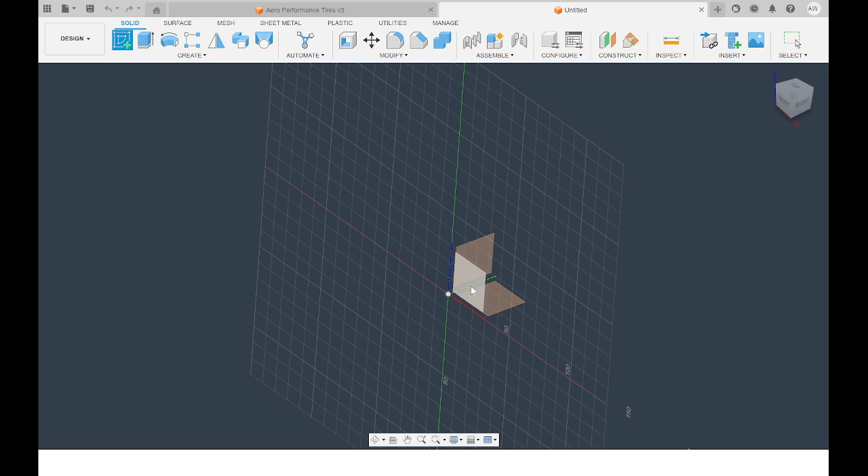So first we're going to do a create sketch right up here in the top left. You're then shown three panels: the XY plane, the YZ plane, and the XZ plane. We're going to start on the XY plane, so we'll click that. Fusion automatically aligns our view here, and you can see this grid, along with all these different options on the right for things you can do.

What we're going to do first is really simple: we're going to draw a circle. Over here there are lots of options to create shapes, like rectangles, arcs, ellipses, and splines. We're going to draw a center diameter circle. Oops, I didn't click the origin.

You want to make sure you're clicking right at that origin point where the little square pops up. Click right there, and we can just make it some arbitrary width, we don't have to worry about that. But look at that, we've got a circle. I'll hit escape to exit.

Now if I wanted to dimension this circle and make it a specified width or diameter, you can hit D for dimension tool, or hit it up here. I'll hit D and drag this out to the side where I can see it. We want to set this diameter to, say, 80 millimeters. You can type in any unit and it'll automatically do it, so if you type in 80 feet—

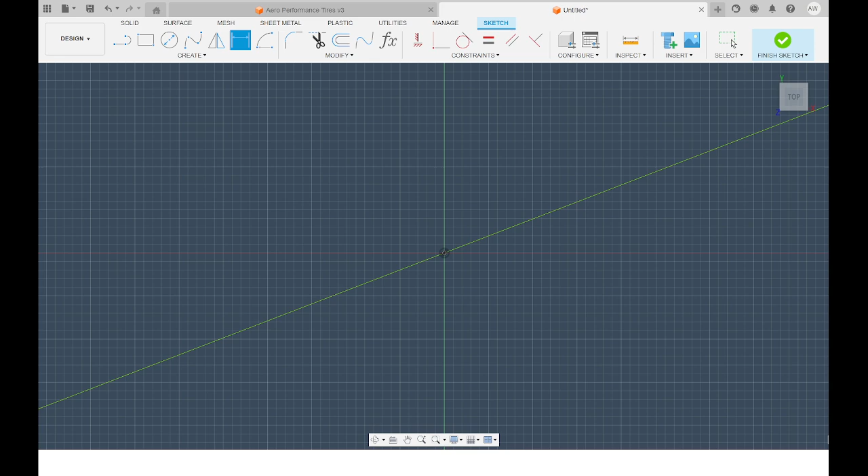Oh, we didn't like that—feet. Whoa, way too big. We don't want it that big, that's stupidly big. Let's go back to millimeters.

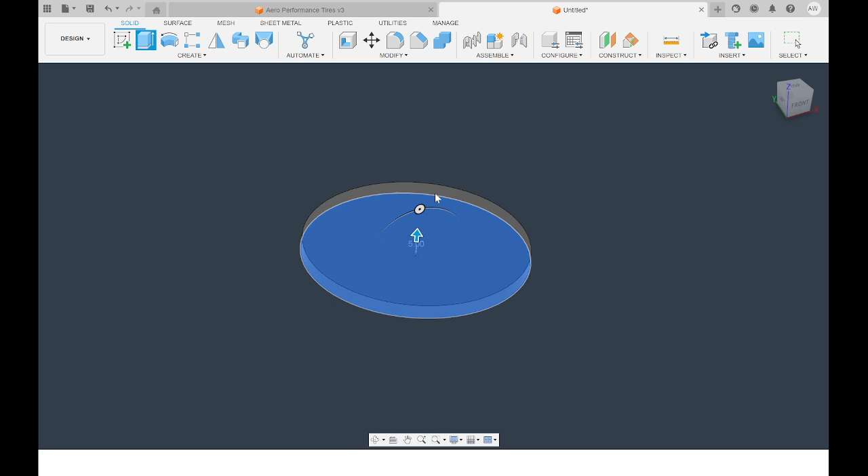Okay, so we've drawn a circle. Now if we were going to do something, we might want to extrude that circle. So I'm going to hit extrude and say 5. But I'm not ready to extrude our circle yet, I want to make some more parts of this profile before we do that.

There's one thing I missed, which is that you should always name your sketches. So I'm going to double click on this and say head profile. Another thing is that we should click on this and actually finish creating the profile of our sketch here, so click that top view.

Now we're making a skull. We're making a skull from the front. It's not going to be truly three-dimensional, it's going to be more like an extruded cross section.

So what I'm going to do to create the cheekbone, I'll say arc—let's say 3-point arc. I'll grab somewhere over here, go down here, and make it go in a little bit. Look at that, now we've got a nice little jawbone. I don't quite like how that is, so I can drag this to different points to get it to be a different shape.

Same with this, and same with this. I think if you grab this, also adjust it a little bit. Let's go back—but I like that. Now you could create another 3-point arc, which again means you're essentially drawing the two points where it's going to go between.

You could do something like this and draw out the radius of that, or you could do a mirror.

When you do a mirror, it's going to prompt you to click the object you're going to mirror, this being that line, and then a mirror line. Unfortunately, you can't just click this middle axis.

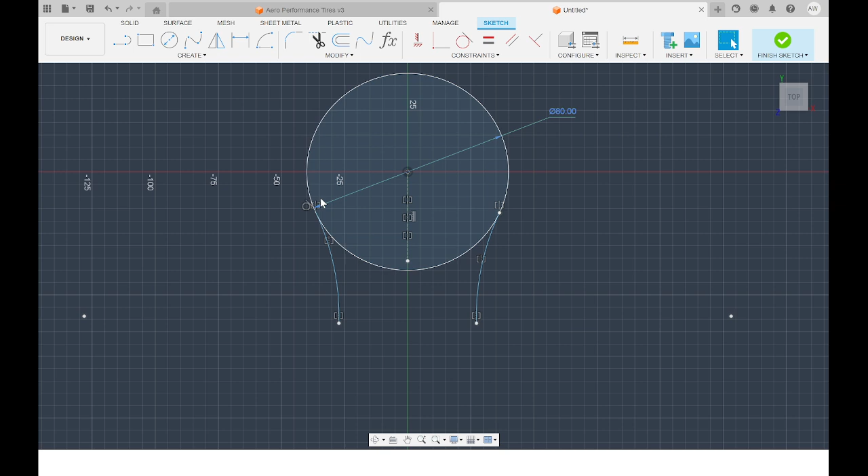So now let's finish the bottom of his jawline, and let's do another arc, another 3-point arc. Let's click the two bottom points here, give him a little jaw. Little smiley boy, yeah, perfect, exactly how you draw.

So everything is symmetrical and constrained, well, mostly everything is constrained. We're not going to get into constraints today too much. We drag everything around, you can see we can configure this. That's the great thing about Fusion, is that everything is now related.

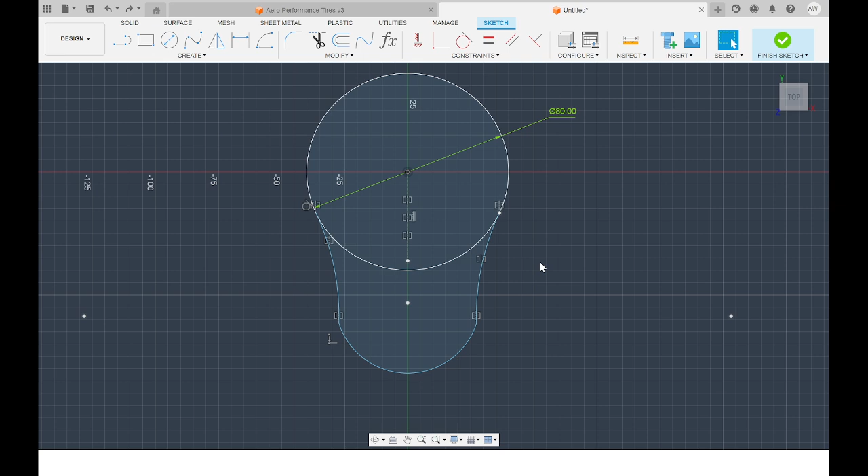So let's put it back to where it was and just hit Control Z to go back. Let's hit Finish Sketch. I like this, so now we've got a sketch on this XY plane.

Let's extrude it. Let's hit this Extrude button, which allows us to click these profiles and specify some distance for them to raise up. You can see we can click them individually, we can unclick them. We want this whole thing to go up, so I'm going to make it go up 5 millimeters.

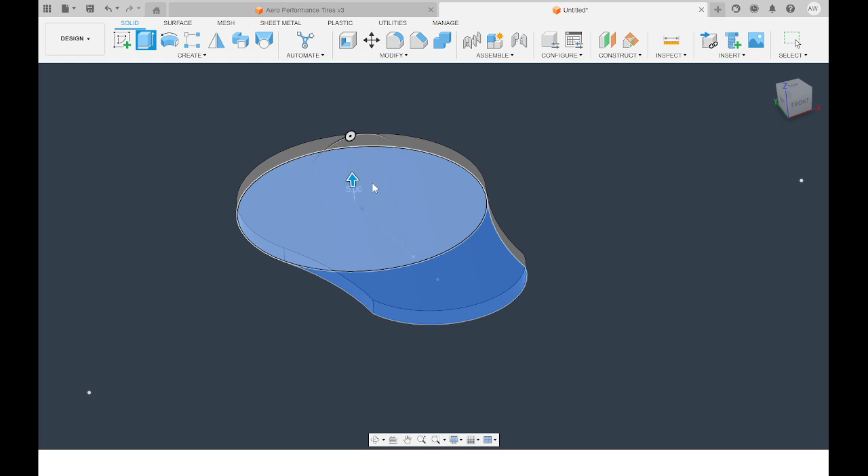And if you ever want to edit that value, or switch between how many millimeters it's going up and how many degrees of rotation it's going, you can hit Tab. I'm just going to say 5 millimeters. Look at that, that's kind of the basic outline of a skull.

You might be kind of curious about how I'm moving around so fluidly. It's because I have a little space mouse in my left hand. Alternatively, you can also just grab and rotate around like that.

Cool, I like that. Sorry, you keep using the terminology sketch, is a sketch supposed to be like put onto a piece of paper and then you're supposed to like? 'Cause I know that a sketch in Fusion you can think of as something that's on a piece of paper, but that you can then make that piece of paper into a 3D object.

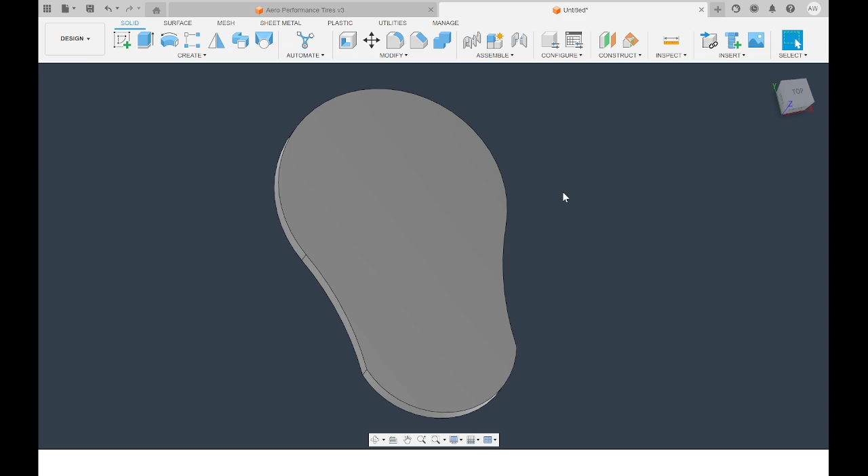Which means that you can sketch on any face or any geometry as long as it's planar, I think. So if I was to sketch on, or oops, that's not what I wanted to do. Exit, finish sketch, we're going to delete that.

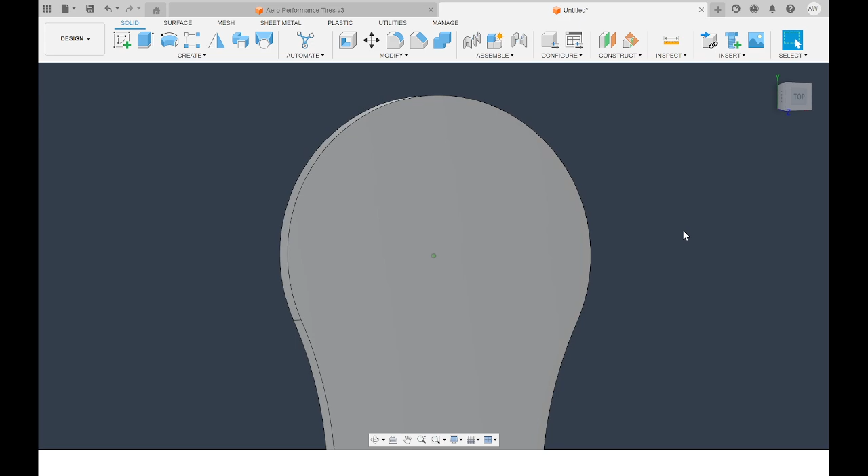I don't know how well it would like it if you tried to sketch on, say, it's not even letting me click this curved face here. You would have to make it at an angle. Exactly, you'd have to make a tangent plane at some point here to do that. So you can think about it like any flat or planar surface that you see here, we can sketch on.

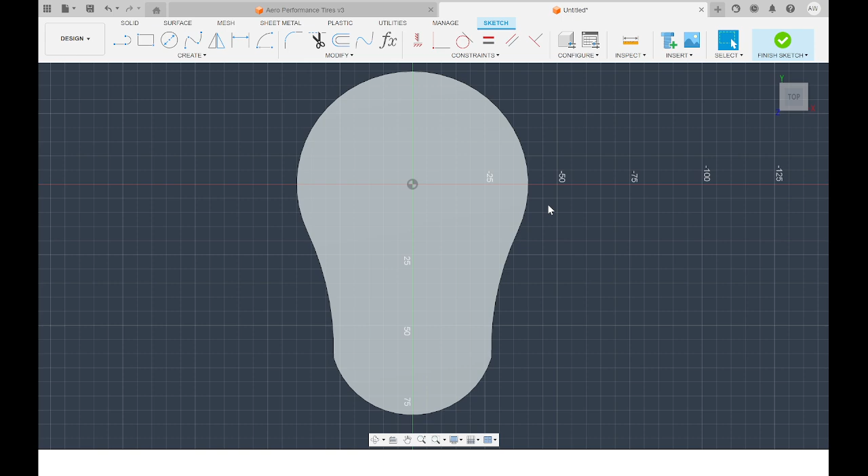And that's actually what we're gonna do next. We're gonna create a new sketch, but on this face. Now it's still aligned and parallel with that top view, so it's essentially the same thing as if we had created a sketch on the actual bottom plane that we did earlier. But what we're doing now is we're doing this sketch with respect to this face, so everything we do after will treat this face as the origin point. That's good because if you have a face way off to the right of your model, it's not gonna get mad at you, it'll let you do stuff to it right there.

Let's draw the eyes. Now this is one of the most fun parts about Fusion, if we do another circle, anywhere, doesn't matter where, draw a little circle, and draw another little circle. It's kinda hard to see on this model because the contrast isn't very good. Let me see if there's a way I can make it better.

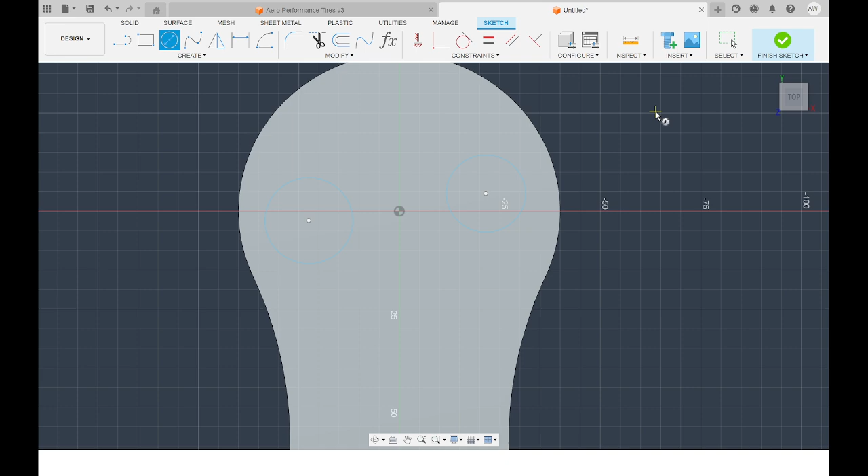Let's make the skull black real quick. I'm just gonna hit finish sketch, go to modify appearance, and it's gonna pull up something potentially. I'm just gonna grab nylon, like a generic dark material, from the Fusion Appearance Library. That helps a little bit, yeah, cool.

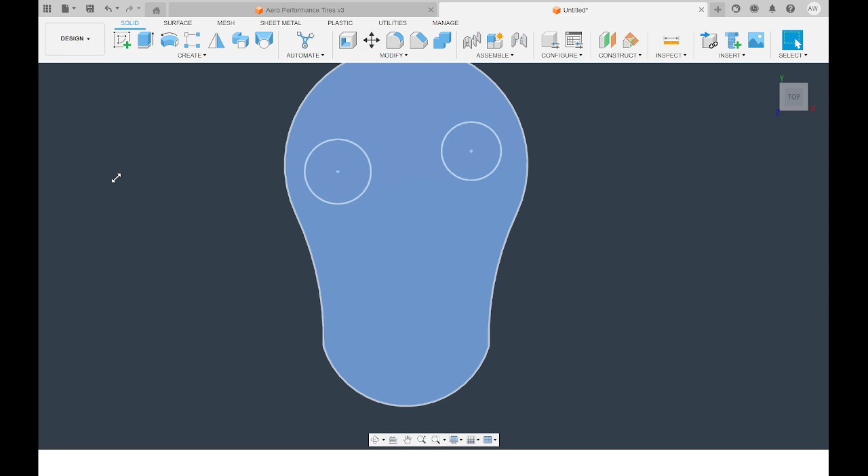So now let's reopen Sketch 4. I'm gonna rename it to Eyes. Beautiful. So you might ask, how do I make these symmetrical? How do I make these the same such that if I do something, they'll do the same stuff? We've drawn 2 circles, let's make them equal. We're gonna go to this Constraints tab up here in this sketch window and hit Equal, Equal. Now they're the same size.

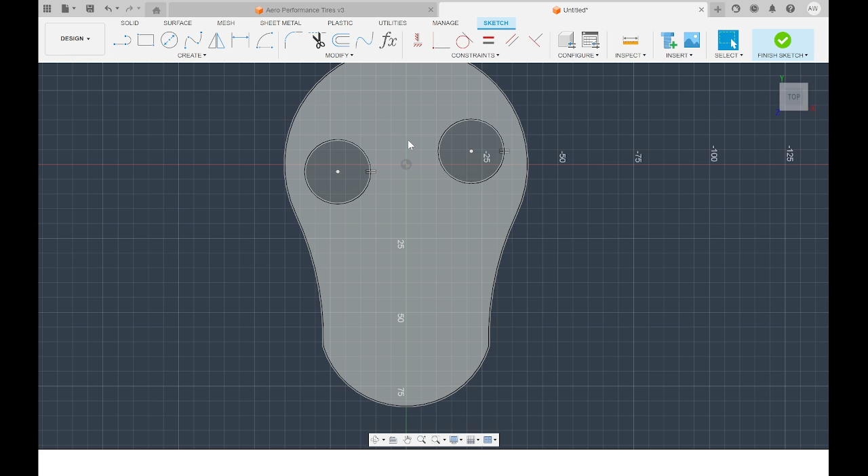We can do the same thing if we say Symmetry. Click you, and I think, no actually, let's do, it should be parallel perhaps? No, what did I do earlier? Did I mirror these? No? I may have mirrored them. What did I do? Perhaps, and I broke my browser. Oh no, it's fine. Symmetry, symmetry.

Let's draw a little, I wanna see if that symmetry tool works before I try a different approach. I just made a line down the middle, I'm gonna make this a construction line. Let's do the mirror command, or the symmetry command. There we go. We drew an axis down the middle, said mirror these two objects, and now we have a symmetrical object, meaning not only is it gonna be symmetrical in size, whoa, big eyes, but also symmetrical in position.

Way out here, do like this, and that's all we need. Now another thing we can do is dimension one of these and say that it's 20 millimeters. Then if we change it to 30, the other one will reflect that change. Let's leave it as 20, we'll come back to that in a minute.

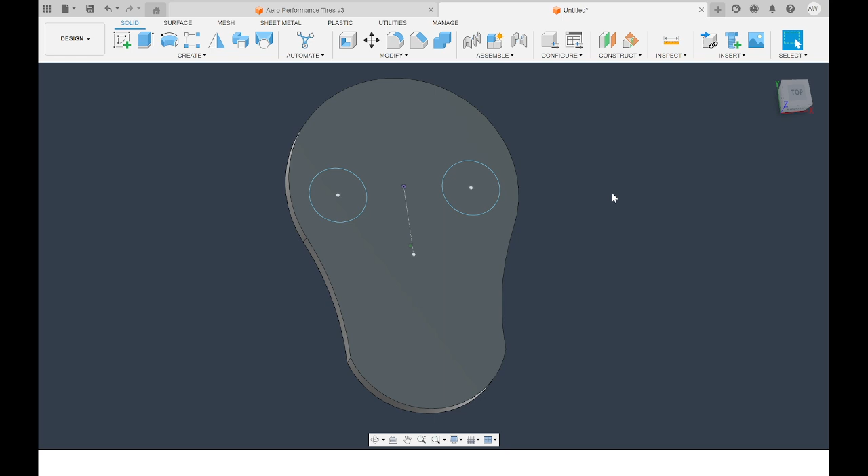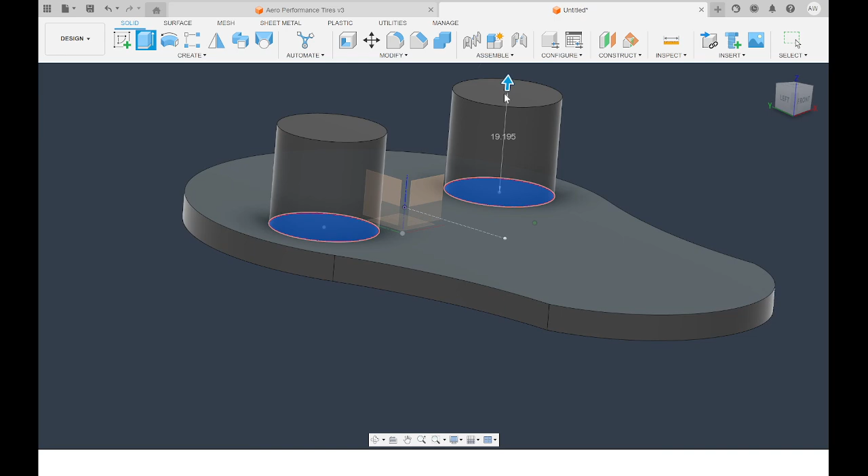Let's hit finish sketch. We sketched, now let's do something. Let's extrude these eyes, but instead of them going outward, like say this, let's have them go to object, and then click this back face. Check that out, they're gonna subtract from our model up to this rear face. Alternatively, kind of the noob way to do this is just to go yoink, and now they're just going through. But if there was something below here that you didn't want to extrude, you could just hit up to face, or up to object, and it'll only go that distance.

And this also works if you have a curved plane that you're trying to extrude up to. If you're extruding onto something that's all kind of messed up geometry, and you say up to part or up to object, it'll fill in automatically and connect with it as it should be.

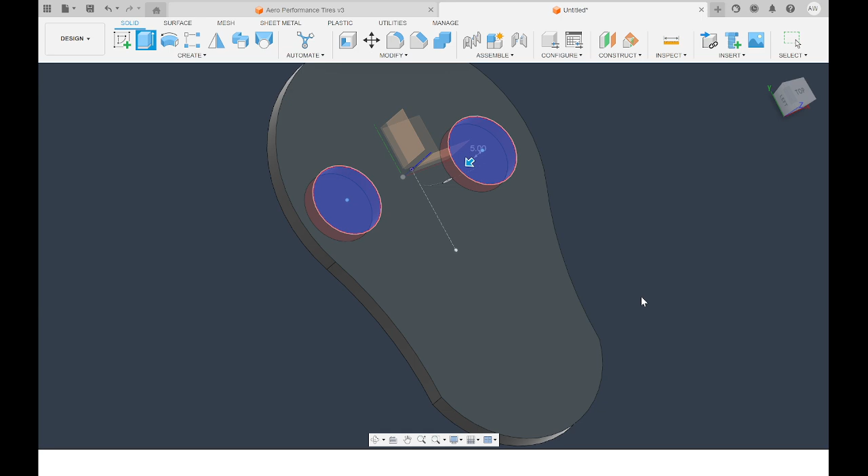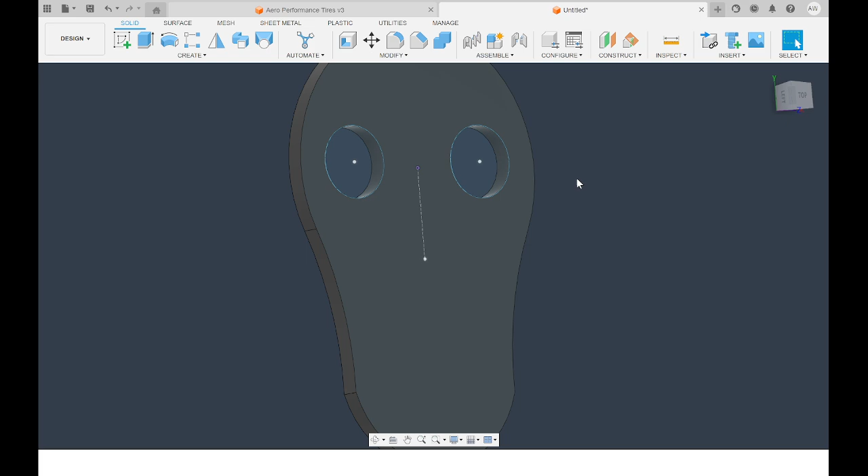Pretty good, right? And our sketches are currently hidden, but if we re-enable this sketch, we can actually still drag these around and change their size. Although we can't change their size because I configured their size to be 20. If I had left that blank, then we would have been able to, but look at that, we can do all kinds of fun stuff, just drag around and play with it and find something we like. So let's drag them back around here. Now let's make the nose.

The nose is gonna be pretty easy. Let's create a new sketch, again on his face. Let's go to this create menu, and you can see that we can also create polygons.

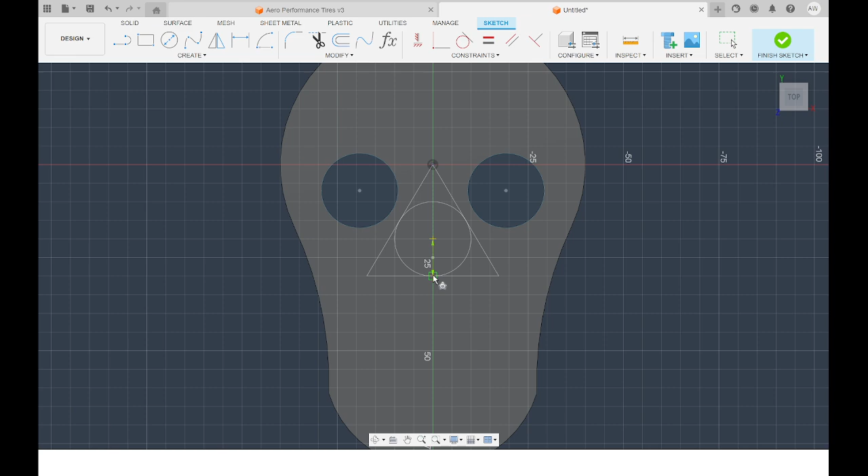Let's do a circumscribed polygon, and just, I don't know, let's hit this point right here. We can make it big, and that's a hexagon, it's not very good. We're gonna hit tab, we're gonna hit 3. Now we've got a triangle. And you can align it so that it's like this, or I think it's more likely like this. Look at that, got a triangle.

And if we had wanted to, we could make it so that we could constrain it. Actually, I forgot to name it again. Nose profile.

We went back into nose profile. Pretty sure we can make it so that it's only horizontal and vertical, which means that if we move it, it's not going to do what I wanted. That's okay, I'm not heartbroken about it. I'm still learning constraints, so we'll leave that for now. But the point is, we've now got a nose.

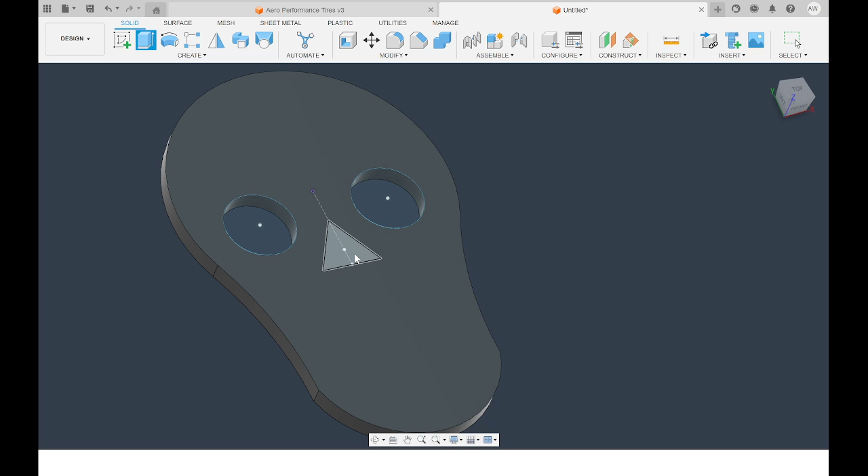What are we gonna do? We did something, we sketched. Now we're going to extrude. Extrude to the back of his head. And it didn't work, why did it not work? To the back of his head. Let's try that again, we're going to extrude this to the back of his head.

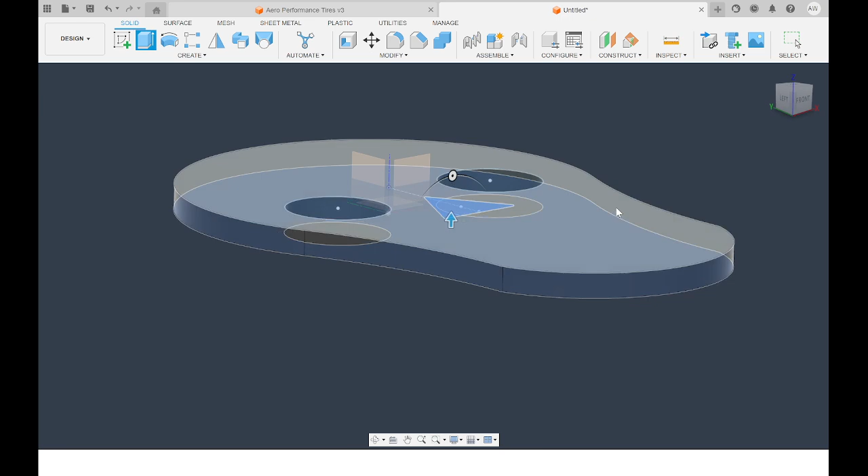And it's not subtracting anything. Oh, that's interesting, apparently I originally sketched it on this bottom plane. I didn't mean to do that. But no matter, because we click this face, and we're good.

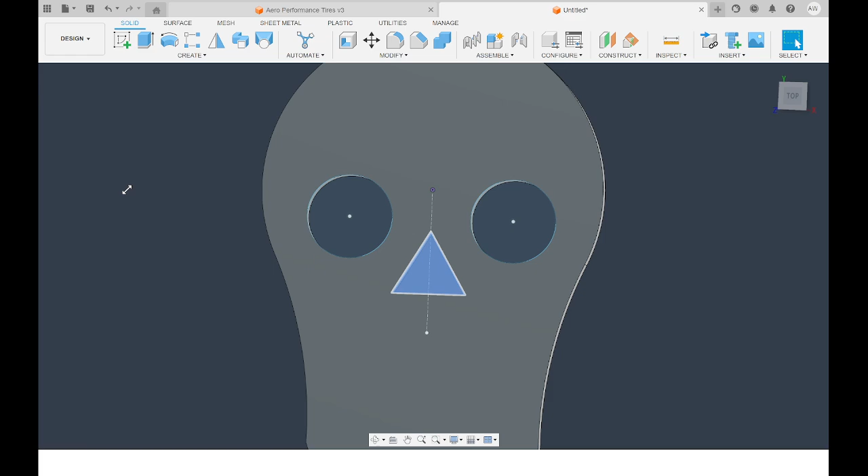So that's all pretty simple. We can move our triangle around a little bit, we can make this side bigger and what have you, and we can grab these points if we go back into nose profile, and we drag this down a little bit, all kinds of stuff. Right now it's centered on this middle axis. It's too big of a nose, so let's bring that in a little bit.

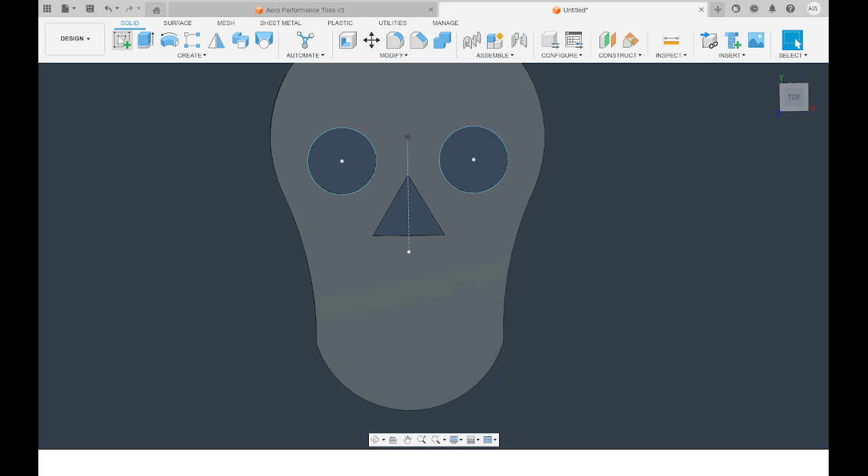Now we're gonna make the teeth, and the teeth are gonna be a little tricky. So let's do a new sketch. Oops, I forgot to click the front plane. New sketch, front of his face, and then I'm just gonna draw a little rectangle, you know, simple little rectangle, something like this. And I'm gonna say, I'm not gonna say okay yet.

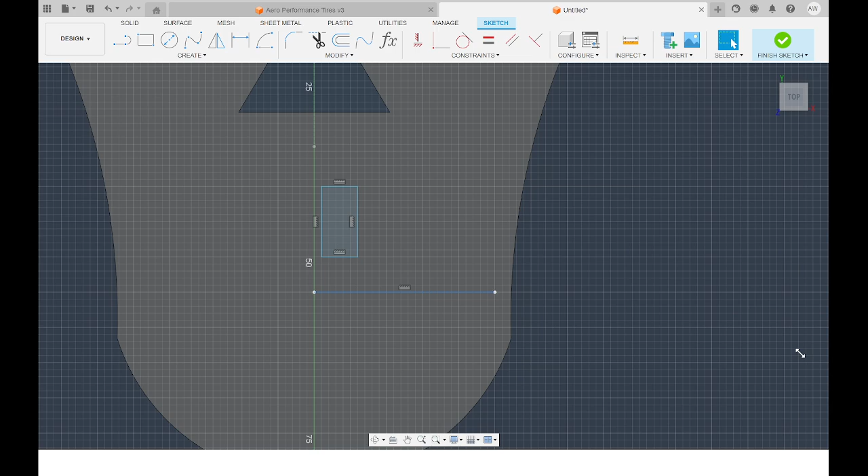I'm gonna draw another line that's going from here out to the side, and I'm gonna make it a construction line. Cool, we're not done with our sketch yet.

Now we're going to create a rectangular pattern. Teeth are a rectangular pattern, right? So let's unclick that, we don't want to make a rectangular pattern out of our construction line. We want to use the construction line to make our rectangular pattern. So let's click the different lines of our tooth.

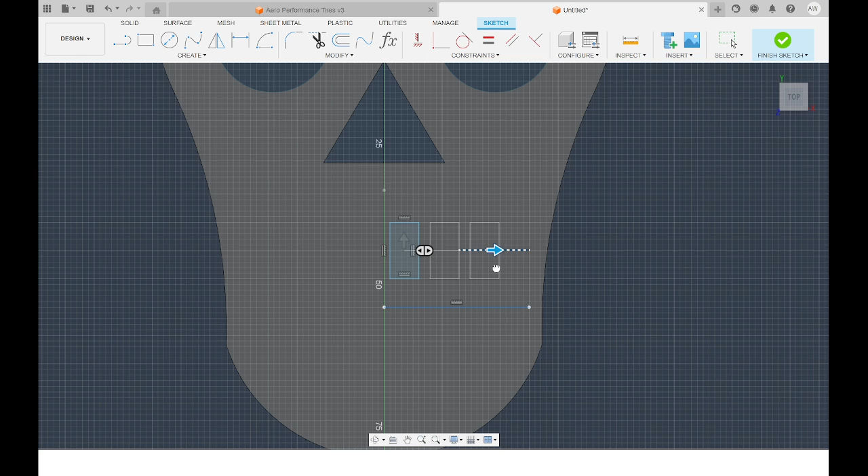How'd you get to rectangle pattern? It's under the create menu. Oh okay, I'm gonna hit directions, I'm gonna hit this. And look at this, pull out some teeth. We can also pull down some teeth.

And you can see right now that it wants us to do 3 on this axis, we're gonna make that 2, and then pull it back up a little bit. And then if we look at this other axis, we grab this, say 4, and we want 4 teeth going out like this. Let's make them like that.

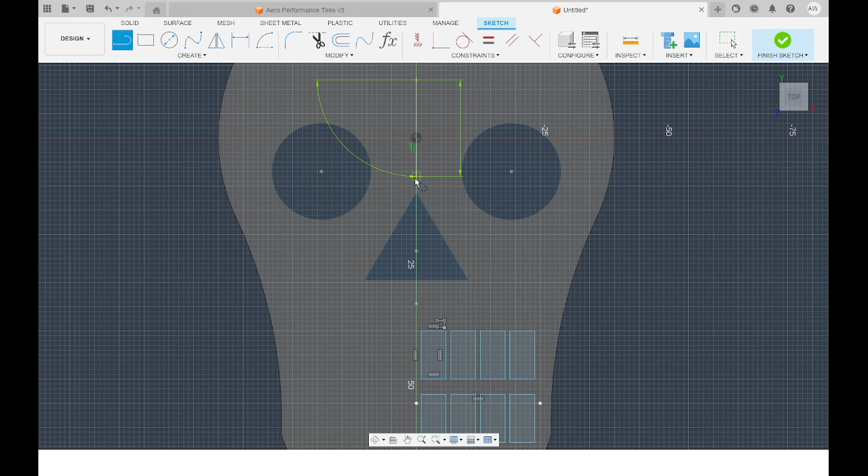Cool. Now, we might need to create another little mirror line, unless we revisit this one, in which case I can still reference that. Can I still reference that middle line? No, I cannot. Let's just draw another quick little mirror line, right down the center of his head here, and make that a construction line just for our own clarity.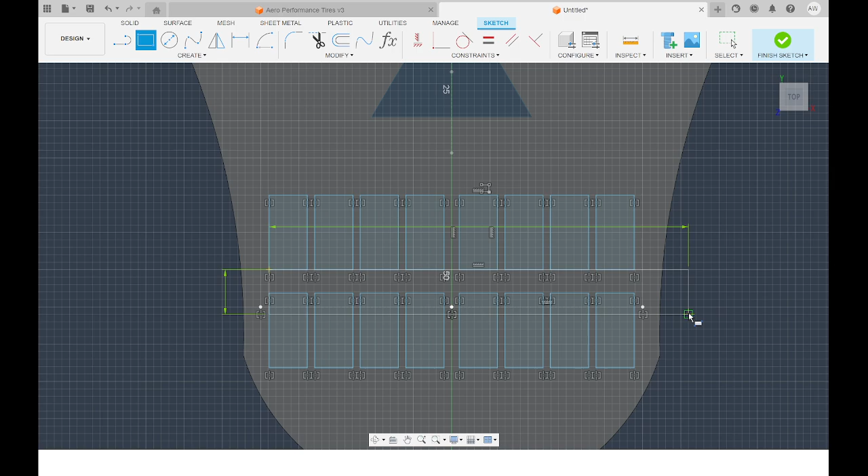Let's do a mirror, select all these, select our mirror line, got some teeth. And then just for my own sanity, so that there can be a gap in between these teeth when the time comes, I'm gonna draw a rectangle that kind of connects these outside-ish points. We'll get back to that in a second.

Well, these teeth I think should come out a little bit, so let's do an extrude. Let's extrude all these teeth. Oops, I clicked the main face, don't do that.

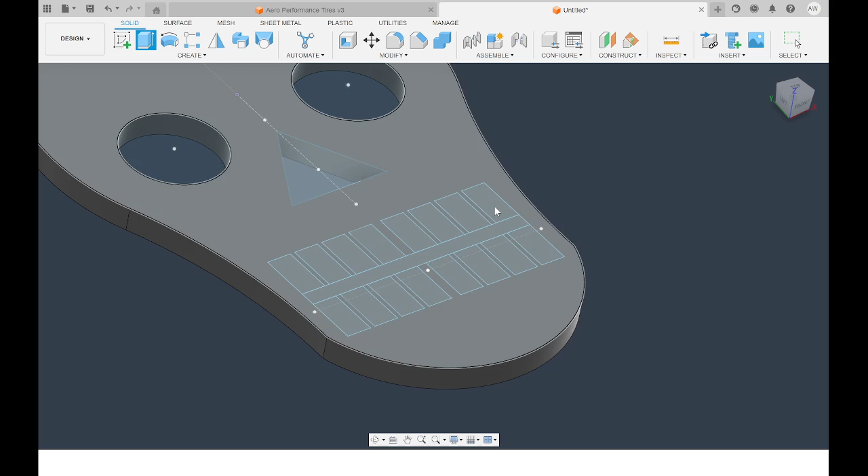Okay, extrude all these. You might be able to hit extrude on the whole sketch. As a matter of fact, let's try that. Instead of doing that, let's do extrude, sketch 7, extrude. That didn't work, oh well. Let's do, oopsies, I keep clicking that main face by accident. Zoom in a little bit. It's a little flashy, I apologize for our photosensitive viewers.

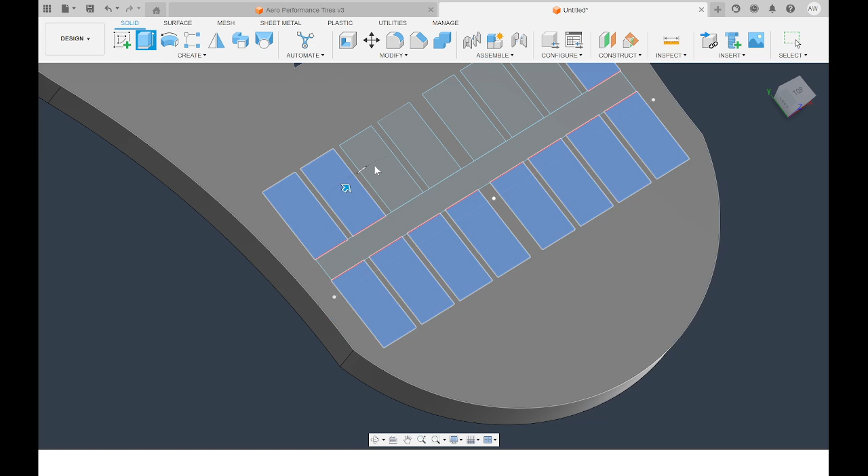Let's click all these. Actually, hide these sketches, that might help. Yeah, that did help. You can also tell if we turn off bodies, that should help. I could do that, unfortunately I've already finished. I would have done that probably. That's probably a pretty good idea.

Let's just extrude these out a pretty small amount. That's too little, let's just do 1. Sure, 1 millimeter.

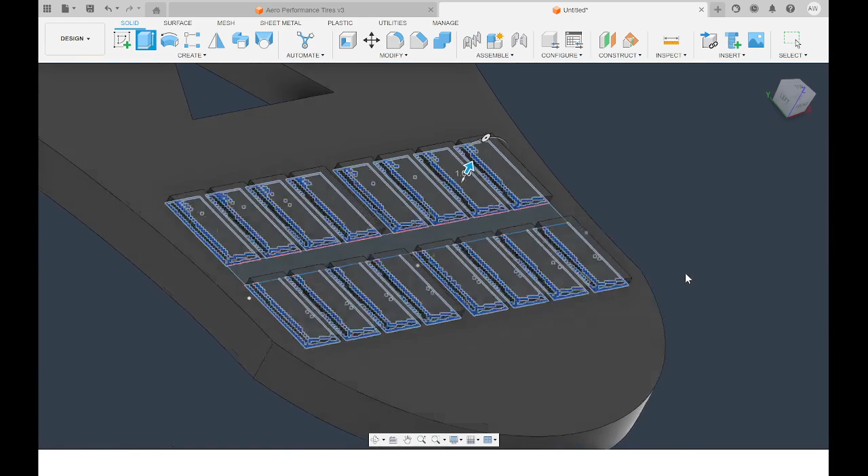If I try extruding again, what would happen? It might have been indicating an overlap was happening. Oh my gosh, I've never seen this before. That could be because of my surface. We're just gonna hit OK.

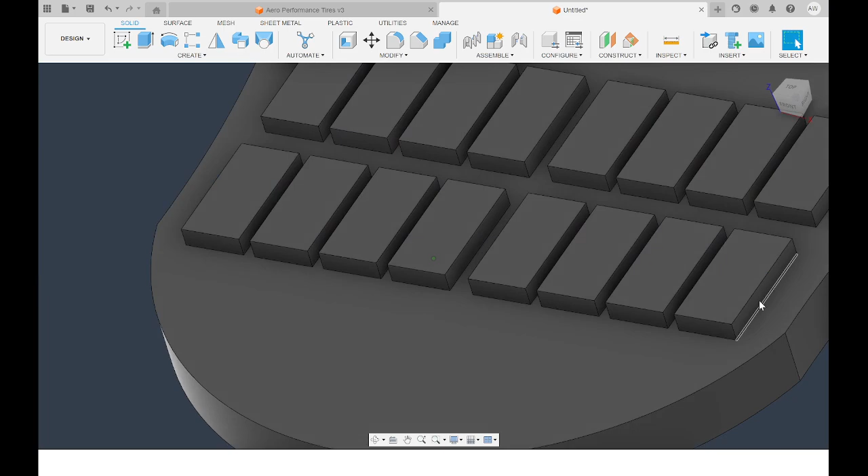Interesting, fascinating, we got some teeth. Let's do another really quick extrude. Remember, we made this gap in the middle. Let's extrude that again, down to the bottom of our object.

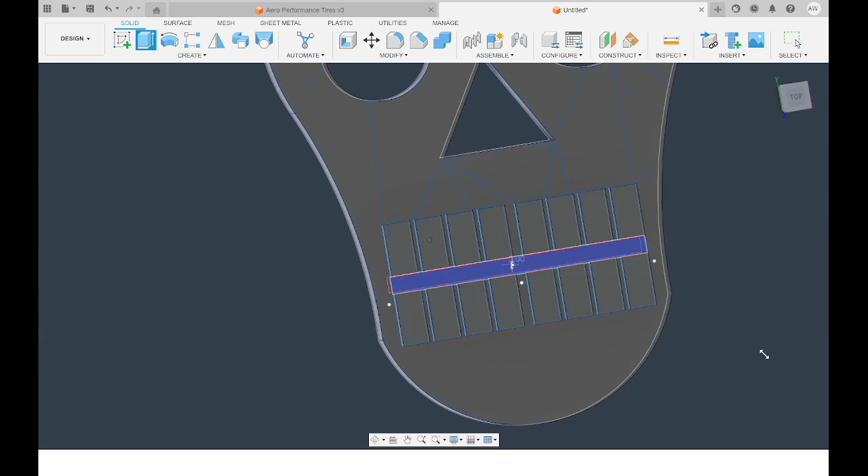What is that? That is so fascinating, I've never seen that before in my life. Is it making a candy skull? Kind of, that's what I'm going for. It was like making some lines that were kind of going to these points. Anyways, look at that.

We've got a skull. Now check this out, we've made our skull. If we go to modify, I'm going to change parameters.

Let's define some parameters. Let's just call it eye width. And it doesn't let us do that because you're not allowed to have spaces. And it's in millimeters, let's say 25. Cool, we've got a parameter defined here. Think about it like a variable you might use in programming.

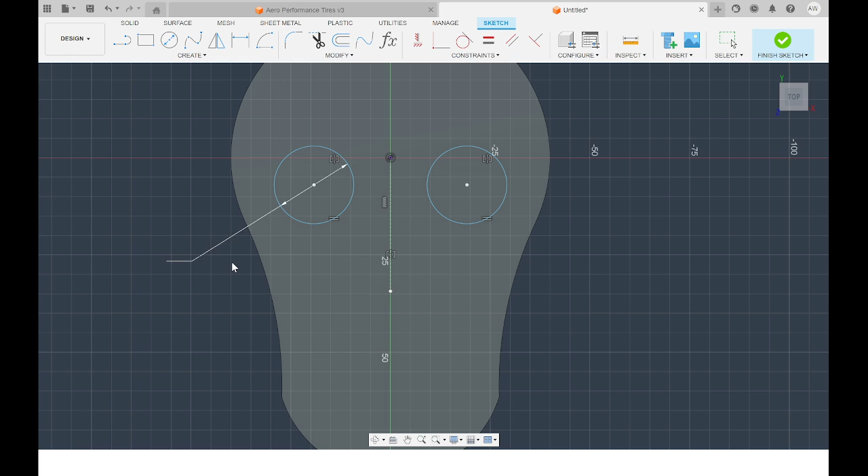Let's go back to our eyes. Let's double click this, type in eye. We can now make this a variable that we can change outside of our object. So if we go to modify, change parameters, what happens if I turn this to 40? Whoa, too big. Oh, that's actually really useful. 20. Parameters are fun. Oops. Yeah, let's just do 20.

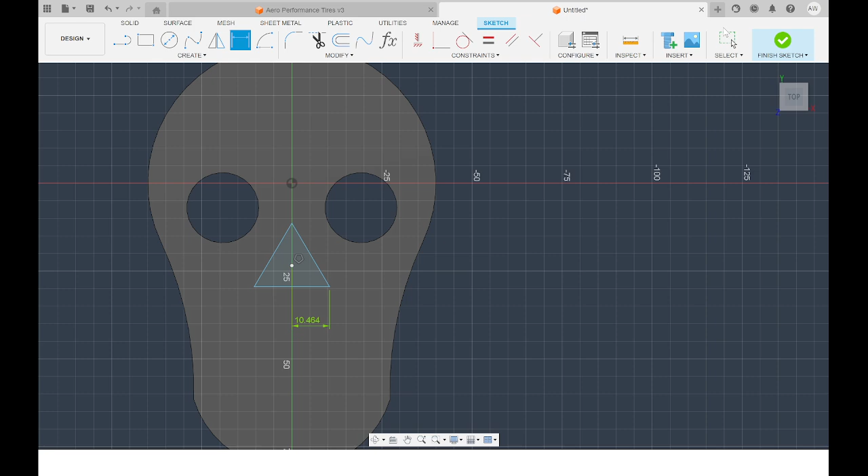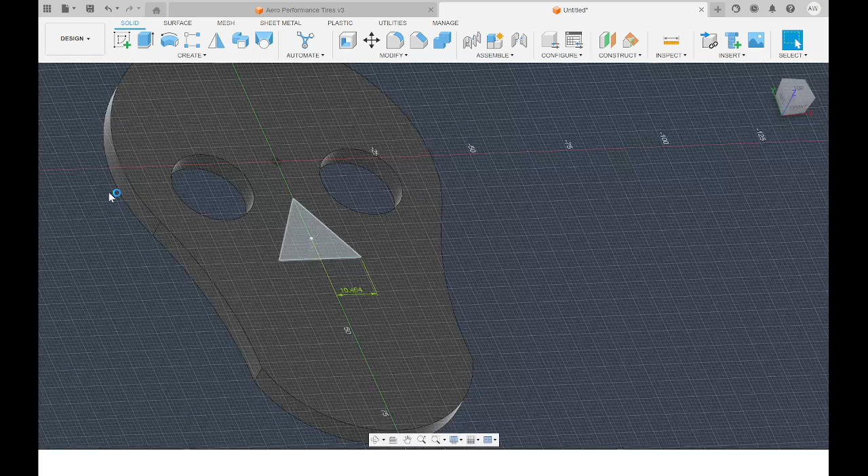And if we defined another dimension for, say, our nose profile, like we dimension this to this corner, and said that this is... actually, here, let's do, I might be thinking about this wrong. Let's go to modify parameters. Let's say nose width, and say that that's like 10. And then close this, go to our nose profile, double click, and then say nose width.

Is that going to work? It did! It did work! So we have two variables now that we can configure.

And the same thing happens if we did our rectangular pattern in this sketch. Although I don't know if we can actually reference... oh no, we can. Can we reference this? Yes! We're gonna edit our rectangular pattern. Let's say quantity is 4.

Let's say we're gonna change parameters, call it teeth amount. Oh, I need to say, let's do 3. We're gonna double click on this little rectangular pattern icon, and instead of quantity, we're gonna say teeth amount.

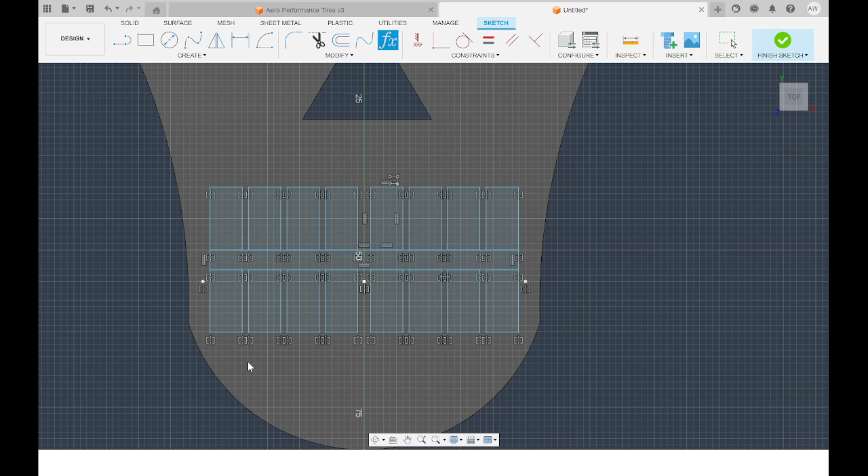It doesn't like it. Why doesn't it like it? Because you said 2 millimeters instead of quantity. Oh, let's do that, let's actually change that. That's a good catch. What was the unit? How do you change it to quantity? Oh, is it? I think it's only length. Oh, that's interesting. Oh, no, you did length.

Let's make another one, let's try unit. Here we go, oh, it's way down there. Currency? What? Interesting, yay capitalism. Yes. Is there an amount one? It looks alphabetic, no, it's not alphabetical. You know what, shot in the dark, try currency. Currency, no, there's gotta be like an amount one. The point is, if you manage to find a way to parameterize that, you can parameterize everything. You can make this... is there a quantity one? Hold on, quantity, go all the way down. Viscosity.

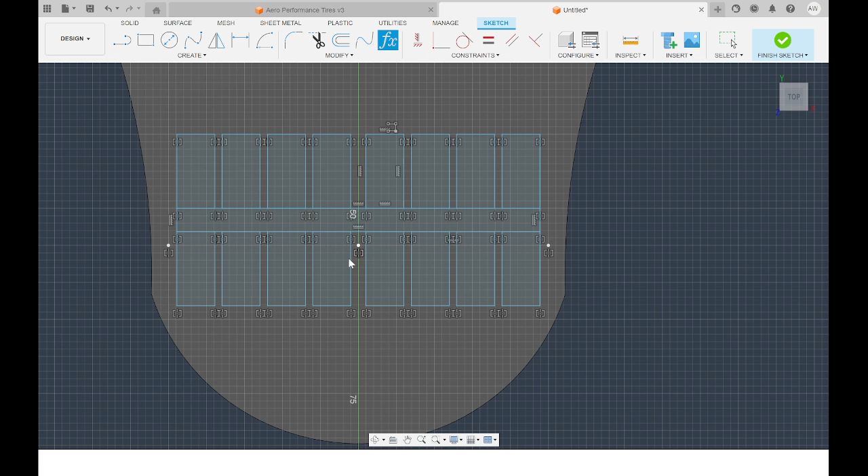Is there, if we do no units, and we say the expression is 4, 34? Does it not let us? Oh, you forgot the name. Let's do teeth amount, let's just see if it's like no amount. Teeth amount? Yeah! Oh, okay. And now, if we finish our sketch, check this out.

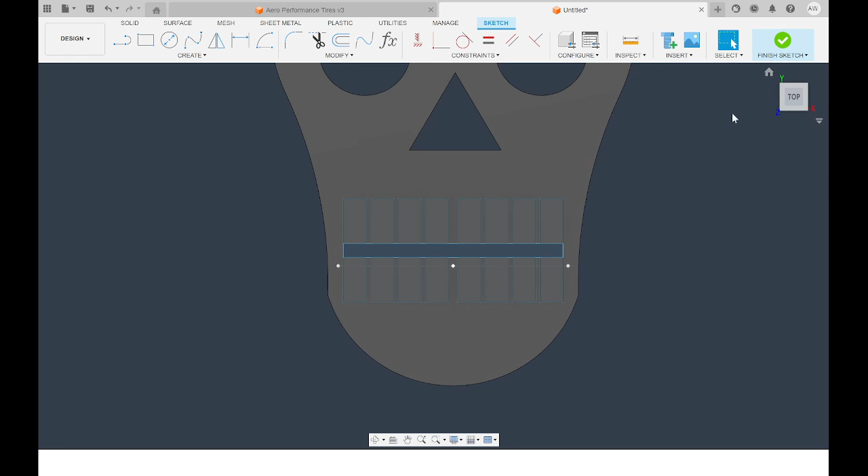Modify. Where is it? Parameters. Teeth amount, 2. It's calculating.

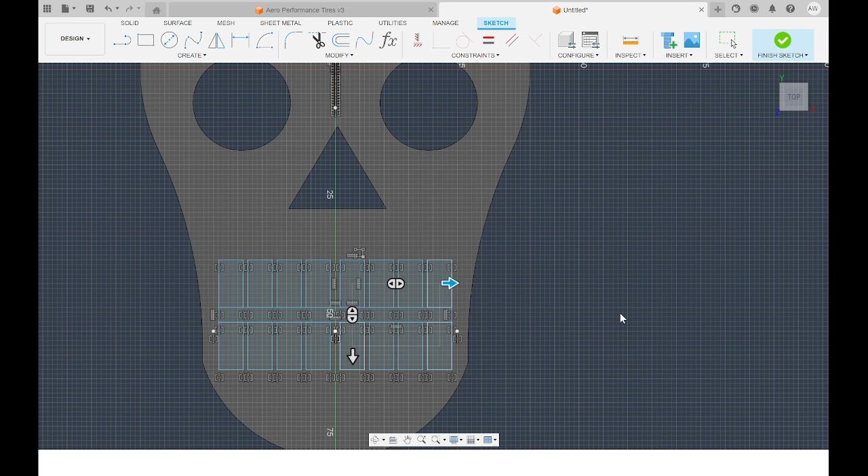Didn't happen, but I think if we went here. Interesting, why didn't it change? Did we never save this to be teeth amount? Did I say okay? Oh, no, it did, it just popped in. And then if we do modify, change parameters, let's try doing teeth amount again.

Huh, wait a minute, 4. There we go. It's just messing up because I individually extruded them, but the thing is you can parameterize everything.

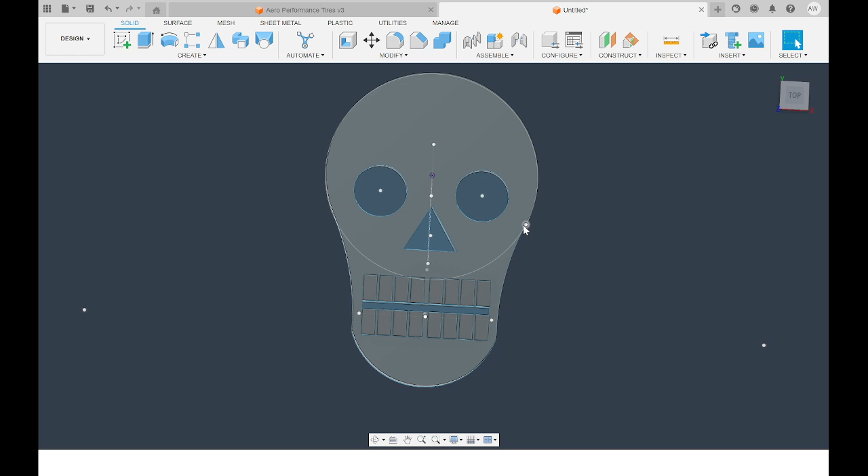Now check this out, if we view all these sketches again, because we did our homework, we can make this skeleton look however we want to, except I can't drag and do anything for some reason. There we go, big chin. He looks like a pirate now.

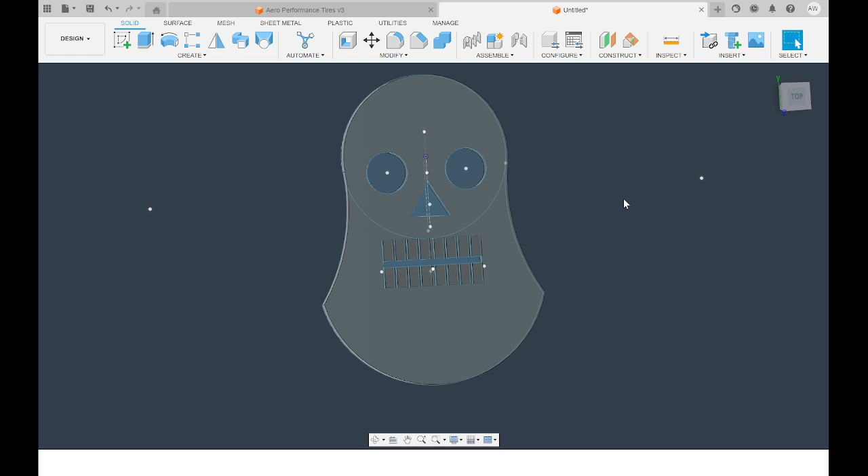True. Did I define the width of this? Let's undefine this, try that again. Whoa! Go back in time a little bit. I actually like that design a bit. That's kind of like from Coco, you know? Yeah, and then, you know, if there were any other parameters.

Whoa, big teeth! Now, to make the skull white as a bleached skull would look, if you remember I went to appearance earlier. I'm gonna go to appearance and just type in ABS, and it just happens to be white. We're gonna go to ABS white, drag, and drop.

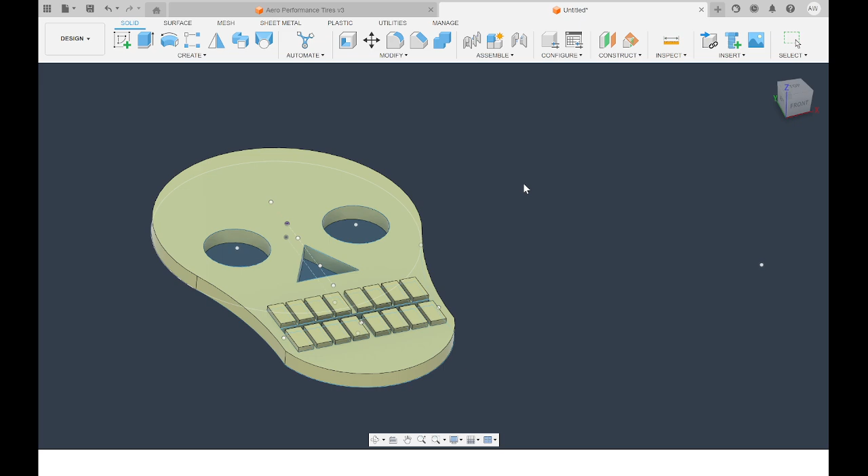Look at that, if we close this, we can see it's white, but if we go back to the appearances, we can double click on this ABS and change it to basically anything we want. Is that only with ABS? No, you can use any material, I just like using ABS because it's a nice base material for me. So now we've got kind of like a turquoise skull.

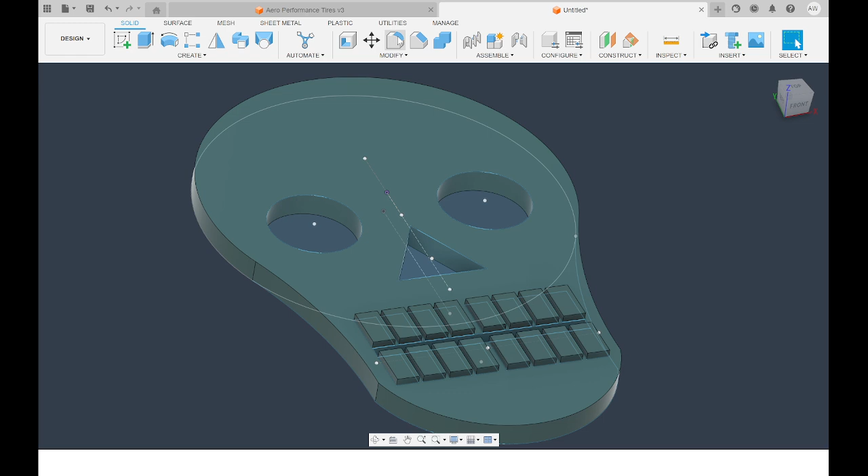Now, the fun part. You may have noticed I haven't done any kind of geometry except for extrusions, that's because you save fillets and chamfers for last. Let's fillet some stuff, let's fillet his eyes and his nose. You're just gonna click on every line that you want to fillet, just drag. Look at that, a beautiful bevel, as Blender people would call it.

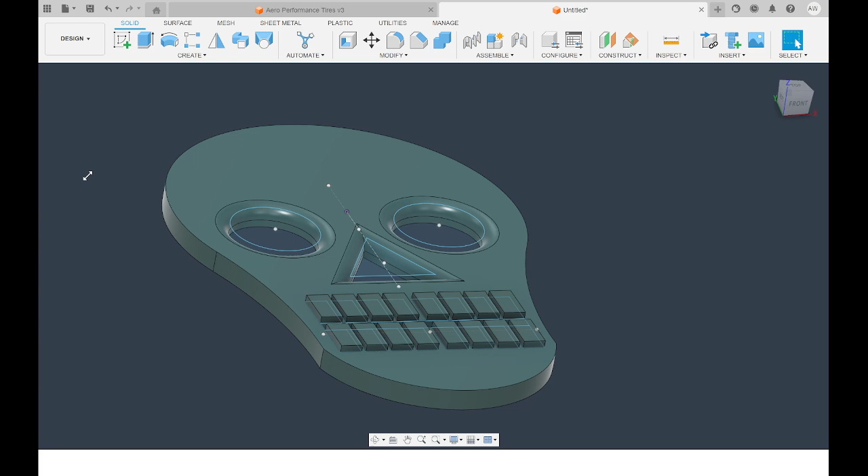Let's save them for last because they're doable. So here's the thing, you want to do them? I've failed to mention one of the most key things about all these CAD softwares: you can go back in time and forward in time and make changes and rearrange things depending on if they can be rearranged. So if you didn't like something you did here and you wanted it to cascade all the way down without dragging out all these different sketches, that's stupid.

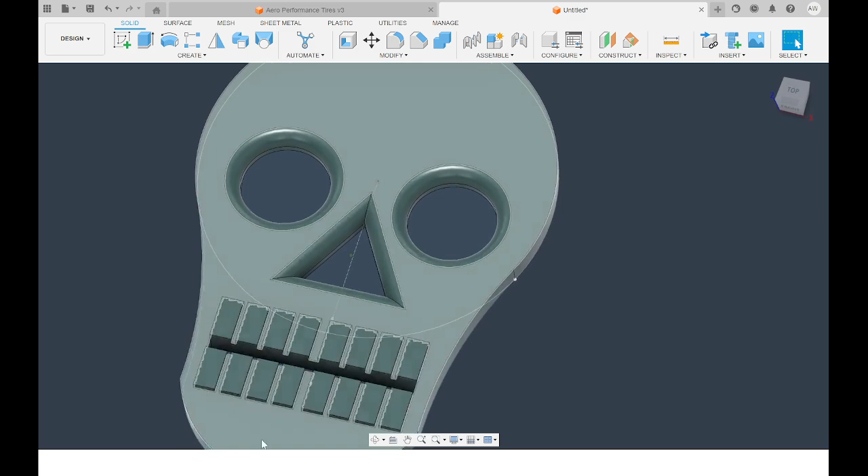Okay, I've defined it, but this timeline is crazy. So I could go back before this chamfer and then do something, or this fillet, and reapply it. Oh, it's like stacking but with physical objects. Correct. Add a little chamfer to the outside, looks kind of nice.

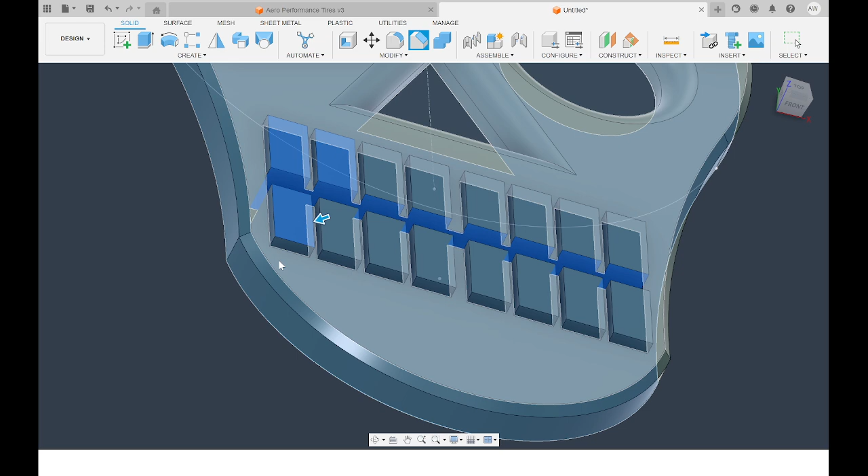Okay, but seriously though, this looks like a pin that you can sell. I might. Let's chamfer, you can't just chamfer edges, you can also chamfer faces. Oopsies, oh no, oh no. Don't get too click happy. Let's chamfer some faces, oops, didn't mean to do that.

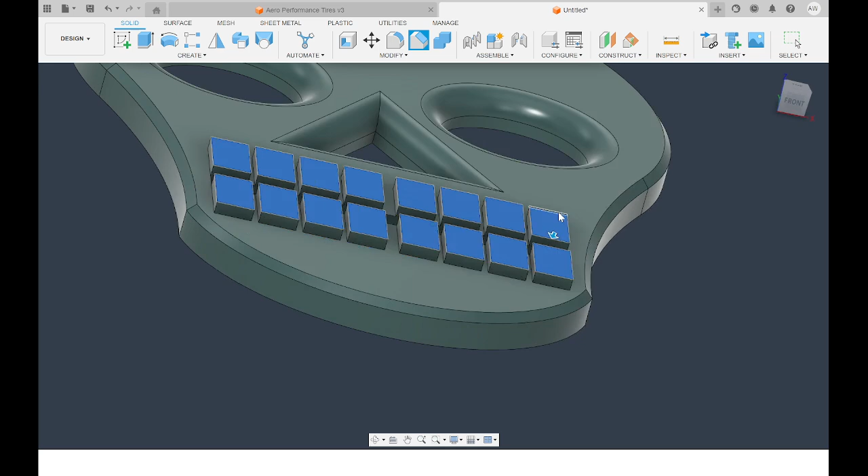Gotta be precise, teeth, teeth, teeth, teeth. Oopsies. Can you select one row and the symmetry will affect the others, or do you have to select them all while doing this? I'm sure there's a way to do that, I just didn't set it up right for that. Look at it, now I've selected all these teeth. Oops, I almost selected that edge. Oops, yeah, something like that.

Oh my god, no, you made a zipper. I made a zipper for teeth.

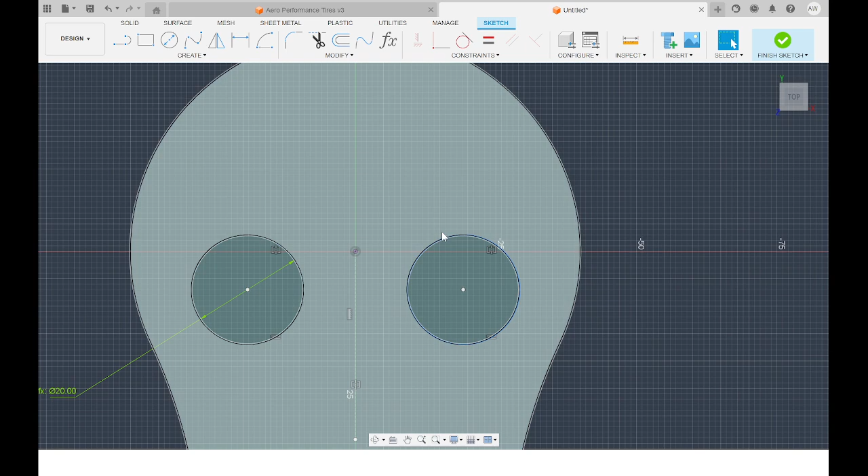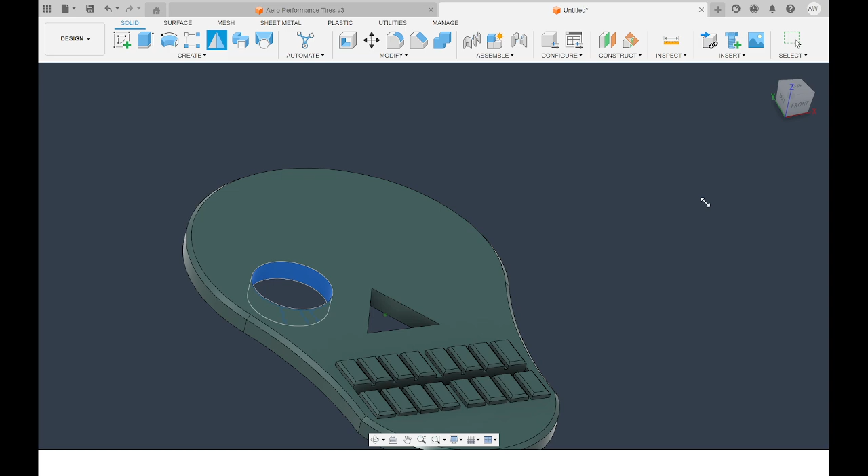I can click, instead of bodies, features, click the eye, click the mirror plane, and because we made this symmetric about the origin, we can do that. Look at that. And the same thing if we went back in time would apply if we applied a chamfer to this first, or a fillet. Oops, too much.

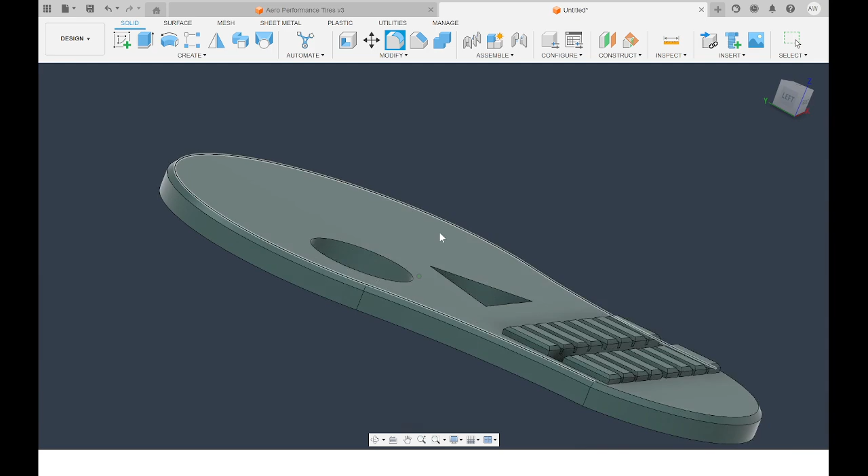What? I selected the bottom by accident as well. Let's unselect that, let's just do this top. Just drag it. Now we hit OK.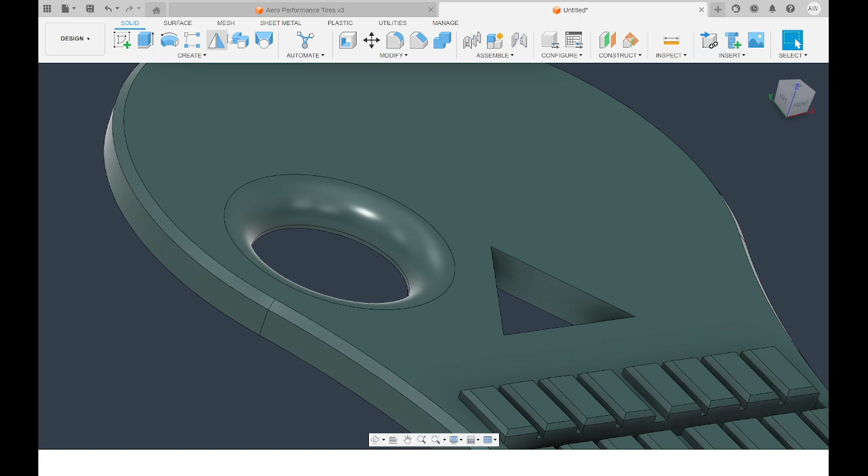Oh, I didn't like it. It hated us. Why did it hate us? Let's try the mirror again. Mirror, mirror line, plane, okay. I think it's because I'm missing that interior face.

Yeah, sort that again. Oops, oh no. Don't mirror the entire back face. No, not good. Mirror plane, there we go. Now it should work. Yeah.

Beautiful. Now there are a ton of other tools in Fusion that I want to teach you about real quick. Let's create a sketch on the bottom plane.

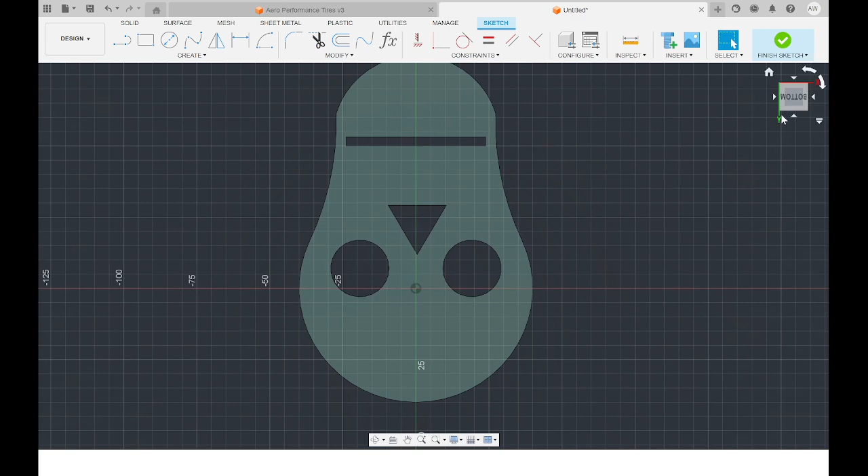Let's just make a random circle that goes around this. Cool. Now if we were to look at the front of this, create a new sketch on the front plane, and say for example find the very corner of this, just draw a little circle.

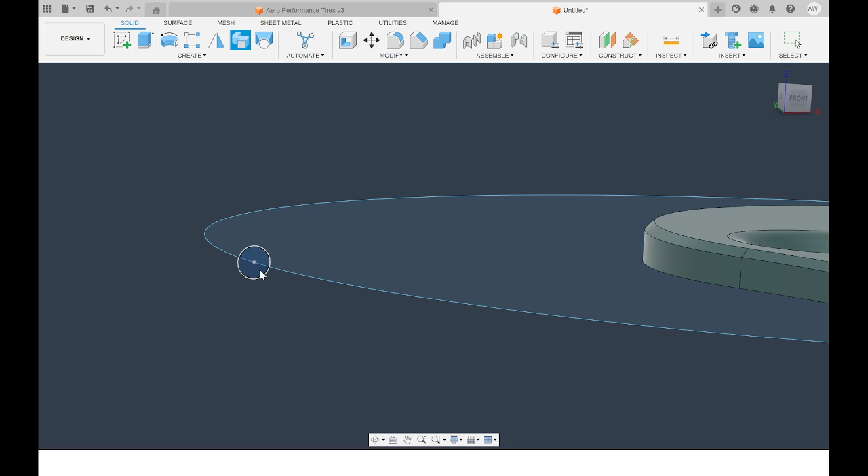Hit OK. Now if we were to take that circle and do a sweep, we can click the circle, we can click the path. We've got a tube that goes around our skeleton. Alternatively, we could also get rid of the circle.

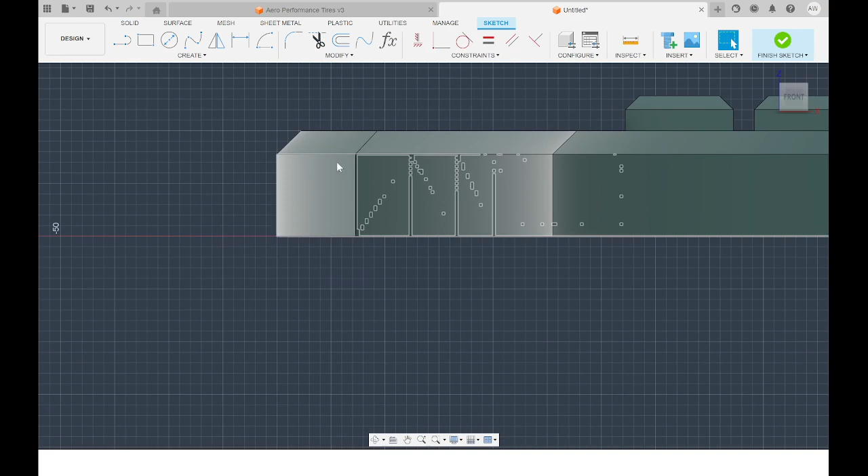Ready to go, get rid of the circle. Instead of doing that, perhaps we create a sketch on the front plane that is tangent to this little edge right here. Just zoom in a little bit. You can also do the use command or the project command.

I'm gonna hit P, click this, hit OK. Now I can reference that corner right over here. Draw a little circle, hit OK.

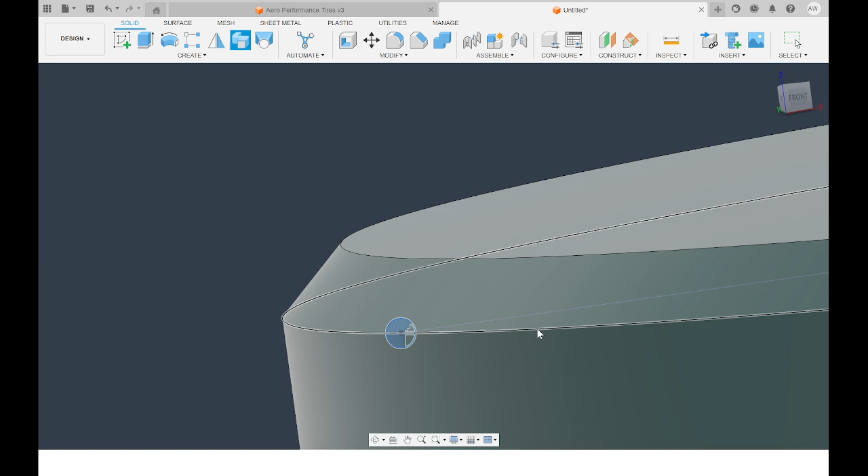Check this out, you can also do a sweep like this. Let's do a sweep: profile, the path. Right now it wants to cut this out. We don't want it to do that, we want it to join.

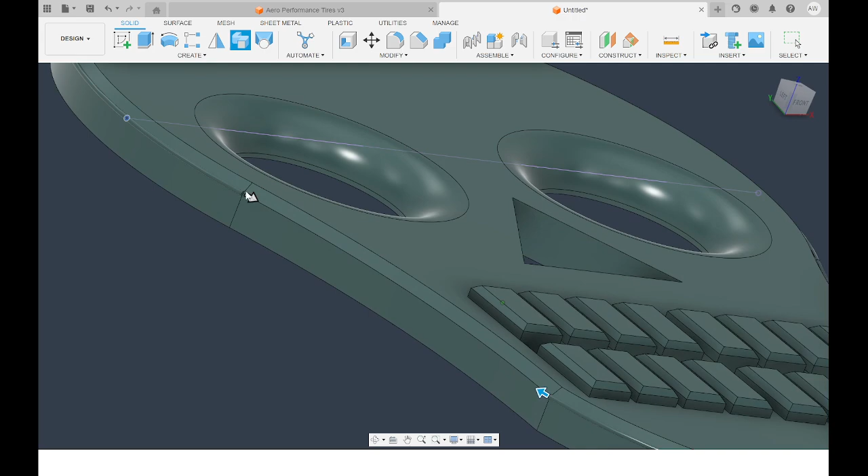And if we uncheck chain selection, we should be able to select more than just this one path. Let's do this path, and this path, and this path. And for some reason we cannot click this last path.

Let's try that again. Let's do a sweep with this profile, this path. We'll just say it's okay. Join, hit okay. Look at that.

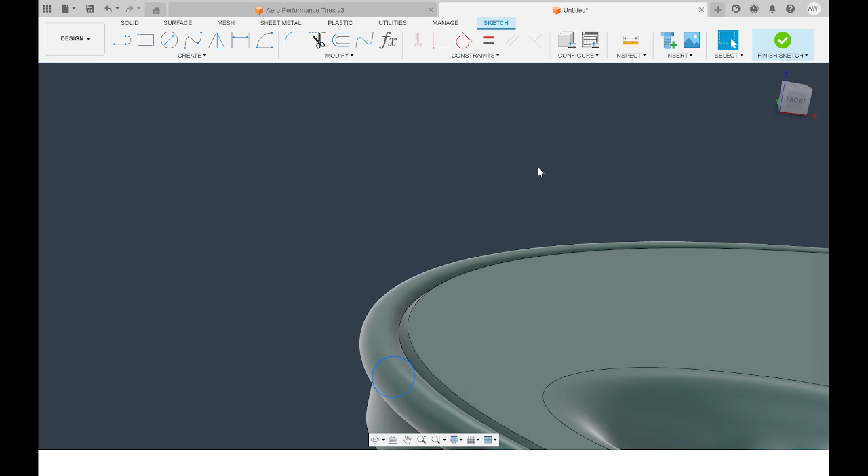And if we edited the size of this, made it bigger, our little path will be bigger. There are lots of tools in here that are very useful.

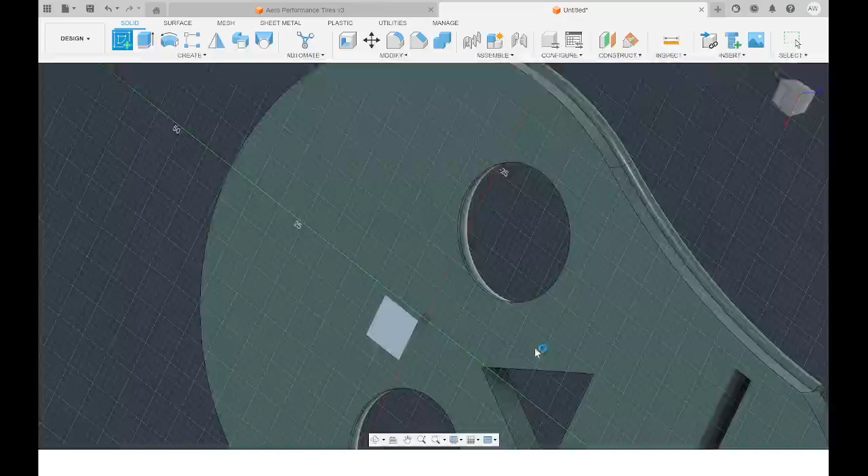Another thing we can do is a sketch on, say again, the bottom plane. Oops, I didn't mean to do that. Let's hit finish sketch, we're gonna delete this. And I'm gonna do a sketch on the bottom plane, but I'm gonna flip it around so we're not actually looking at it from the bottom. So I want to create this text as if it's on the top.

I'm just gonna say create text. Draw a little text box somewhere, you know, Andrew. Say the height of this is something lower, make it a, oops, we did it too early.

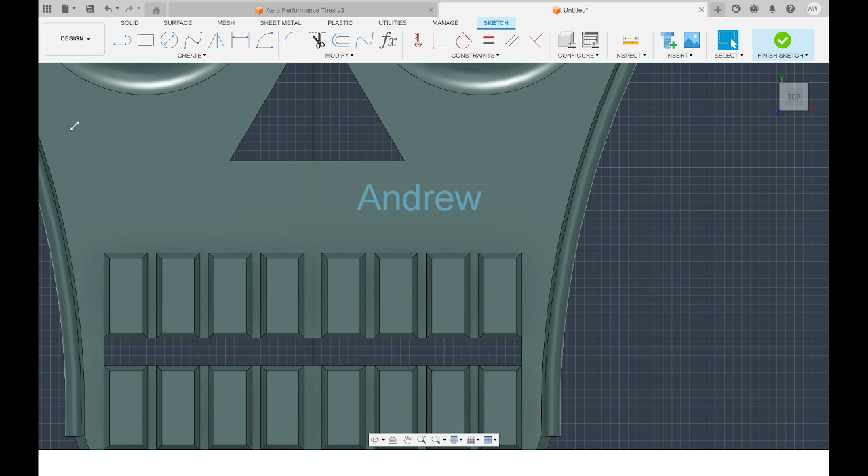I'm gonna go to bodies, hide my body, double click on that so we can edit it again. Let's just center these, and let's say it's actually like 2 maybe. Okay, finish sketch, review our body, and check this out.

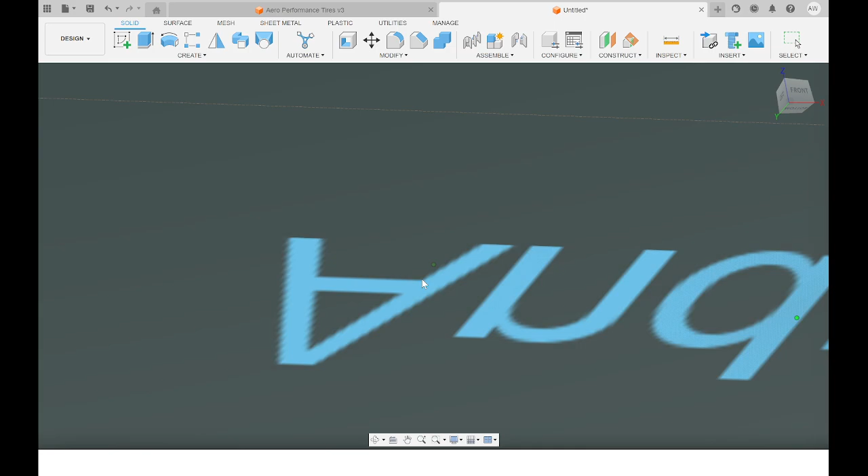We can do an emboss. We click the sketch profile, that being this text, if it'll let me. Unless it won't. Faces, click this face.

Okay, it's just text, put that in. That's cool. Now something else we can do is it doesn't have to be a flat face.

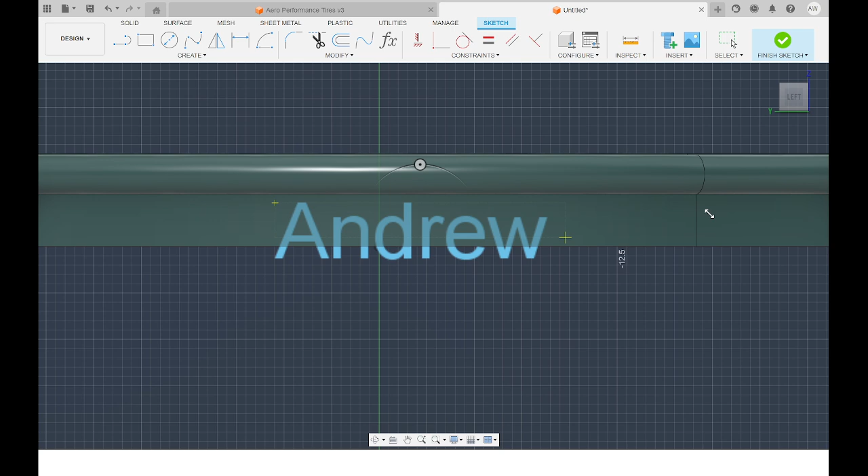Let's do more text. Let's do a new sketch, text, on this plane. Let's do text, Andrew, 2 millimeters. Okay, check this out.

We have an Andrew in the middle of our model here. We do create, emboss, click this face, and it will curve it to fit the face. That's so cool. Oh, that would have been so easy for one of my projects, if I had known.

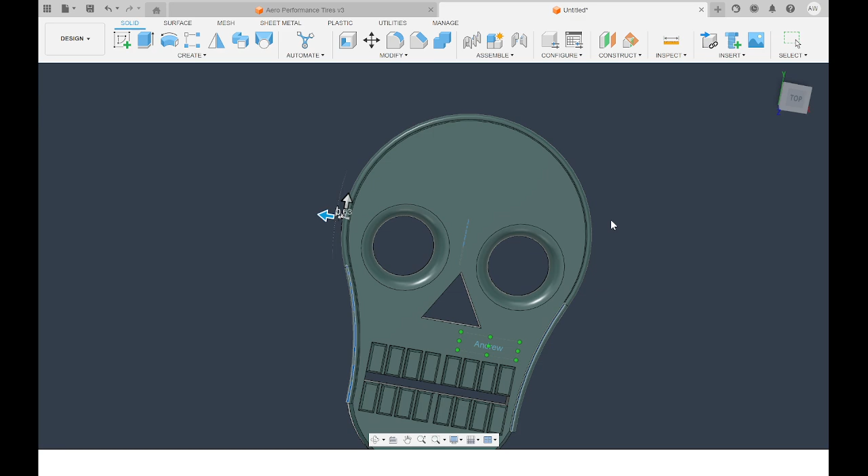All right, I have shown you the tools. I will now come around and help individually.